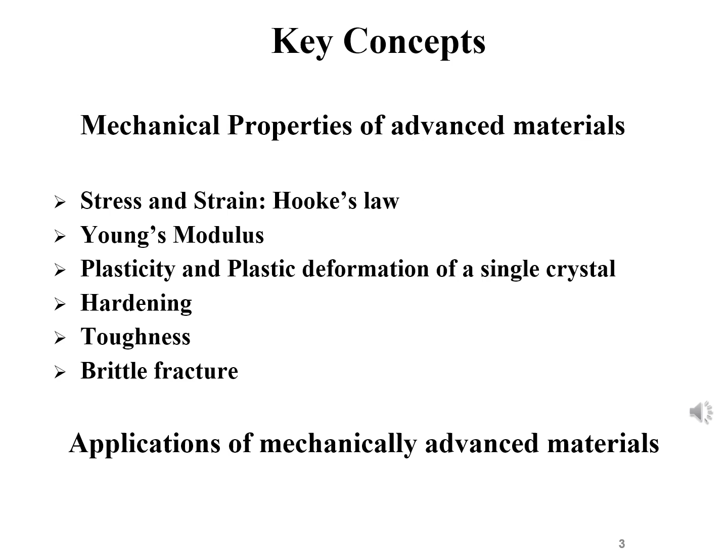So what is Hooke's law? It is related to stress and strain. It is a direct relation of stress and strain. When a material is submitted to an elongation force, its deformation is proportional to that applied stress. So the coefficient of proportionality between the stress, sigma, and the strain, epsilon, is Young's modulus, denoted as sigma is equal to E multiplied by epsilon.

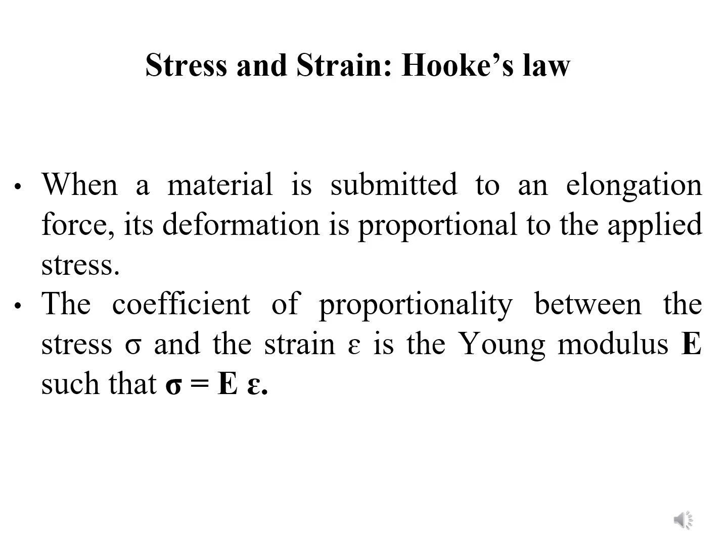Young's modulus is stress over strain, and it is denoted by E. We already discussed strain, that it is change in the length of the material divided by its original length, and stress is force divided by cross-sectional area. So we can represent stress as F over A and strain as delta L over L, and stress divided by strain is Young's modulus, and if stress and strain are directly proportional, that is known as Hooke's law.

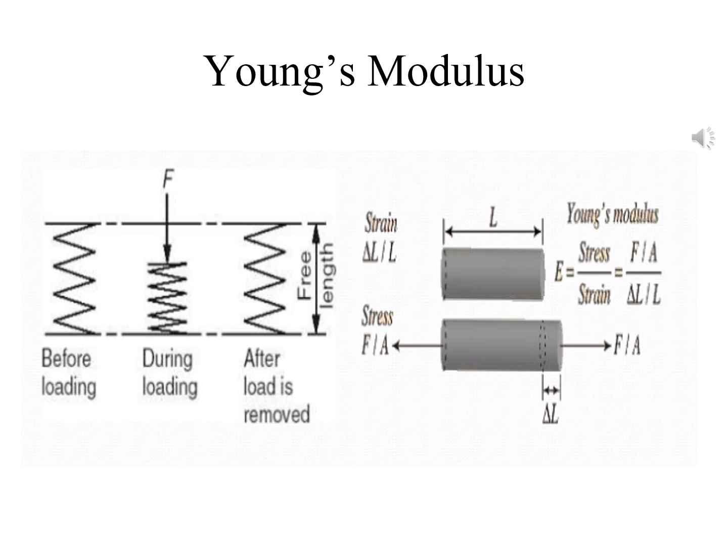So what is plasticity? Plasticity is non-reversible deformation in response to an applied stress or force. So how does plastic deformation of single crystals happen? When a material plastically deforms, its surface shows slip bands, and these slip bands are the emergence on the surface of dislocations. The orientation of these bands depends on the crystallographic structure of the material in which the plastic deformation occurs.

Here in the figure you can see the slip direction is on the right side, and you can see slip planes and steps that are known as slip steps, and the bands here in dark blue color are known as slip bands.

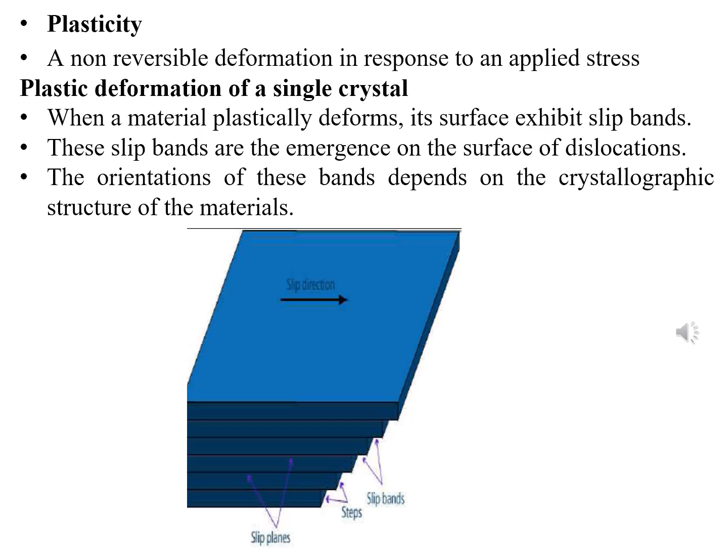So when dislocation occurs, plastic deformation may take place in single crystals, and this depends upon how the crystallites are arranged in that material and the orientation of the bands. When they slip, there will be plastic deformation in that material, and that plastic deformation is non-reversible. It cannot return to its original shape.

Dislocations are actually another type of defect present in crystals. Dislocations are the regions where atoms are out of position in crystal structures. When atoms are out of position in any crystal structure, we call them dislocations. A dislocation is actually a defect in a crystal.

Dislocations are generated and move when a stress is applied. When you apply any force or stress, these dislocations may occur and they can move. The motion of dislocations allows slip plastic deformation to occur. As in the previous example, due to dislocations, defects in crystals may emerge, and slip bands start in that material, due to which the material will be deformed.

If we compare early measurements performed on nanostructured materials with conventional grain size materials like bulk or micro materials, these experiments showed that nanostructured materials have lower Young's modulus values compared to conventional or bulk materials. So mostly nanomaterials have fewer defects, they have fewer dislocations.

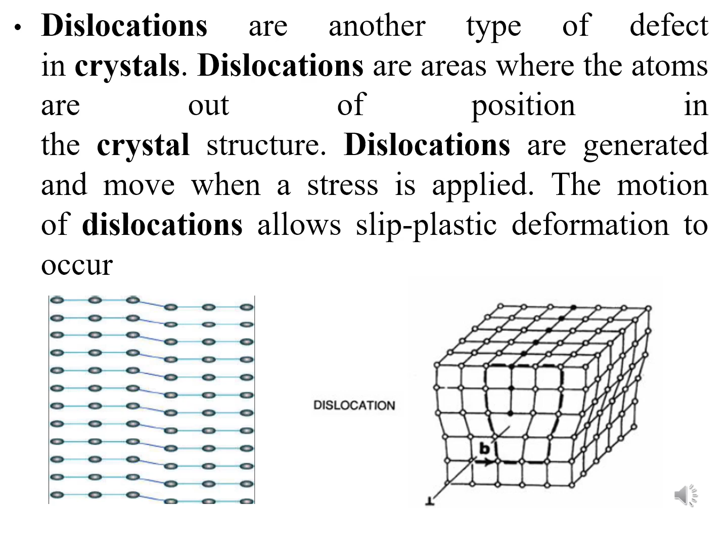Before, we generally discussed hardening and hardness of materials. Hardness of materials occurs when the motion of dislocations becomes difficult, even impossible, in that material. So a material in which motion of dislocations is difficult will be hard; it will show hardening properties, or hardness. Plastic deformation starts when dislocations become very active under

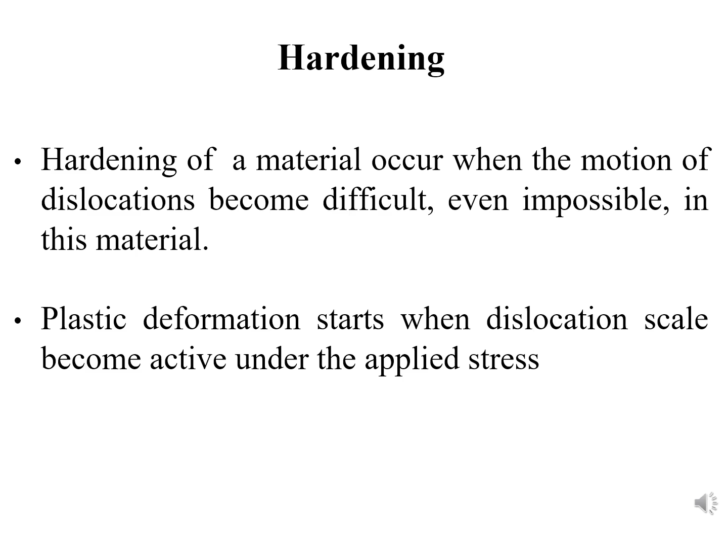In the case of the hardening process, among many of the novel mechanical properties of nanostructured materials, high hardness has been discovered in many nanostructured materials. In the appropriately synthesized systems, the hardness of nanomaterials or nanocomposites significantly exceeds that of the mixture in bulk. Super hardness also comes from pure nanoparticles.

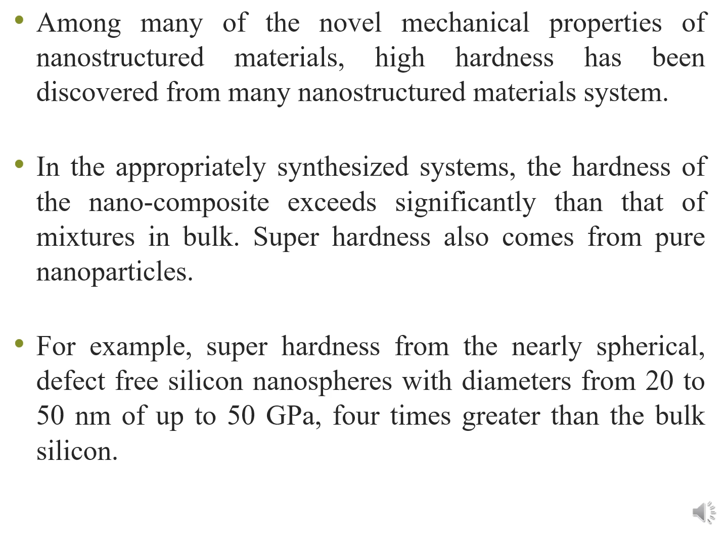Toughness: the ability of a material to absorb energy during deformation up to fracture is known as toughness. So a material is generally considered tough if it withstands a high level of stress and can dissipate strain energy without brittle fracture.

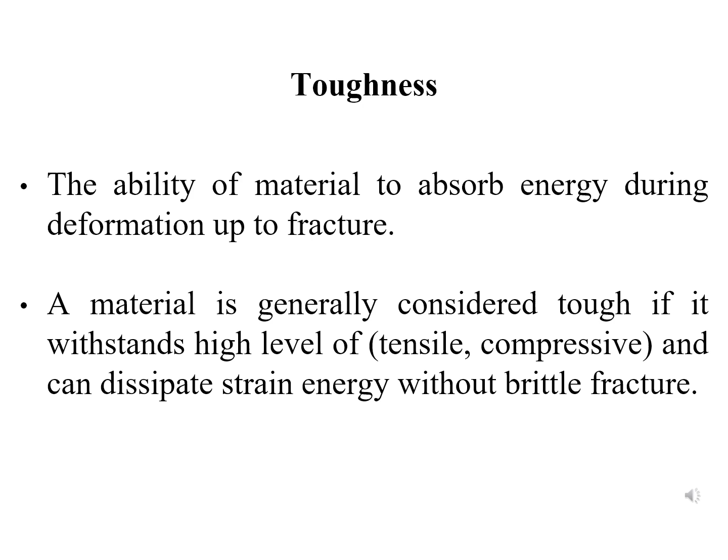Then we will talk about brittleness or brittle fracture. When we are checking mechanical properties of any material for designing, in addition to strength and hardness, toughness is also very important, and we should know this property as well.

So what is brittle fracture? Brittle fracture is the result of rapid crack growth. As the failure mechanism of high strength materials like nanomaterials is governed by brittle fracture, toughness is the key mechanical property used in material designing instead of strength and hardness alone.

So toughening mechanism: what can we do to make materials tough? For that purpose, multi-layering is an important mechanism. One way to improve nanomaterial toughness is to combine a hard nanocrystalline phase with a soft metal matrix, and we can improve its toughness. And toughening can be done using multi-layer design.

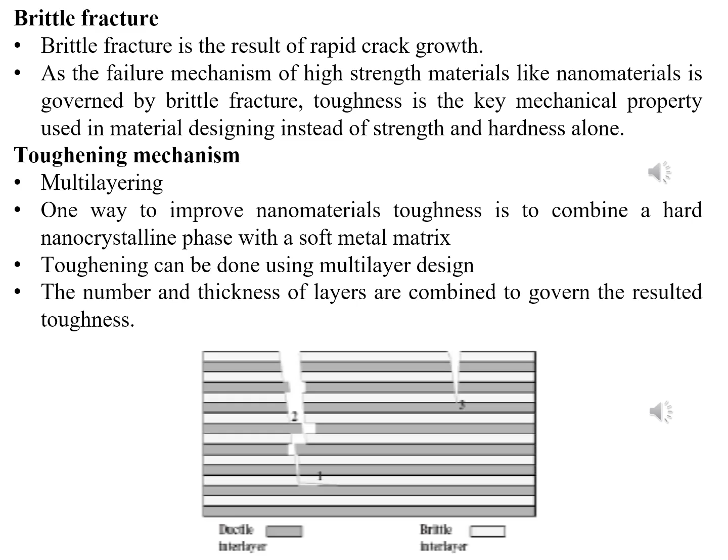As we discussed the mechanical properties of advanced materials and their characteristics related to their structures, if we consider these unique mechanical properties, nanoparticles can be used in a variety of advanced materials in different applications in different fields. So here we will discuss some important applications. First, tougher and harder cutting tools can be designed with nanomaterials.

Cutting tools that are made up of nanomaterials include tungsten carbide and titanium carbide. These are two examples of cutting tools made up of nanomaterials, and both are much harder and have much more wear resistance.

What is meant by wear resistance? Wear is a loss of material from a surface by means of some mechanical action. If you apply some force and there is a loss of material, wear resistance describes up to which force this material can maintain its shape or its surface. And these cutting tools are erosion resistant.

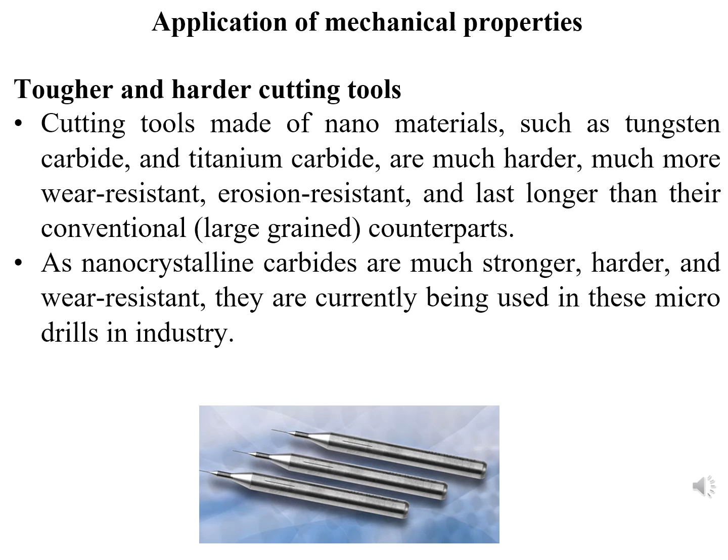Taking the example of nanocrystalline carbides, as they are much stronger, harder and wear resistant, they are being used in micro drills in industry. Here is the figure of these micro drills below, and these are made up of nanocrystalline carbides, which may be tungsten carbide or titanium carbide.

The next application of mechanical properties is automobiles with great fuel efficiency. As nanomaterials are stronger, harder, much more wear resistant and erosion resistant, they can be used in spark plugs. A spark plug is a device for firing the explosive mixture in an internal combustion engine. Here is a figure of spark plugs.

So automobiles mostly waste a large amount of energy by losing the thermal energy that is generated by the engine.

So engine cylinders are planned to be coated with nanocrystalline ceramics such as zirconia and alumina, which retain heat much more efficiently, and they result in complete and efficient combustion of fuels. So mostly automobiles waste energy in the form of thermal energy, in the form of heat.

So engine cylinders are coated with nanocrystalline ceramics; examples of these nanocrystalline ceramics are zirconia and alumina. These cylinders are coated with materials which retain that heat more efficiently, and they reduce the loss of that thermal energy, make the engines more efficient, and make the consumption of fuels less.

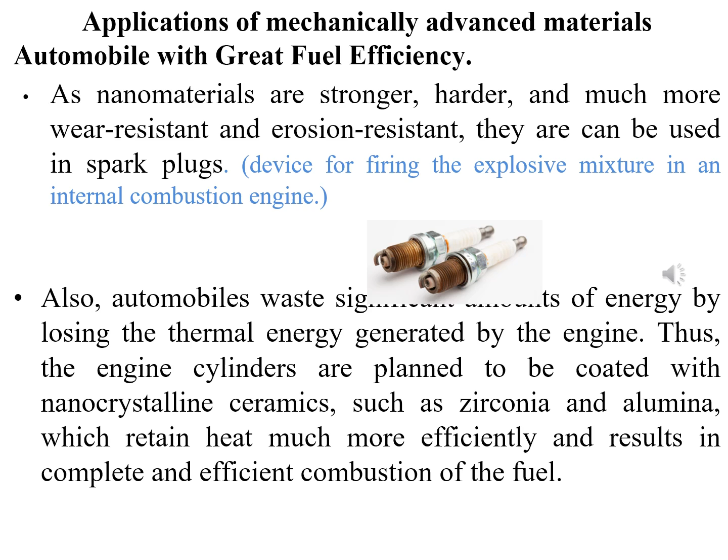So the next application is aerospace components with enhanced performance characteristics. Fatigue strength increases with a reduction in grain size of material. Now we can say that nanomaterials provide a significant reduction in grain size over conventional material, due to which the fatigue life is increased by an average of 200 to 300%.

So, what is actually fatigue? Fatigue life or fatigue. So, fatigue is a weakening of material that is caused by cyclic loading or stress that results in progressive and localized structural damage and the growth of cracks.

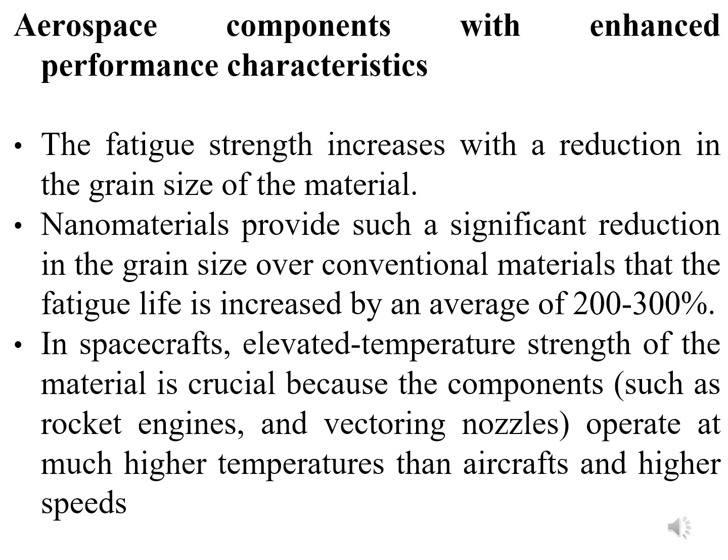So in spacecrafts, elevated temperature strength of material is important because components such as rocket engines and vectoring nozzles operate at much higher temperatures than aircrafts and at higher speeds. So these nanomaterials can provide fatigue strength and greater fatigue life as the size of material is decreased.

Next are ductile ceramics. Ceramics in bulk, if we consider them, are very hard, brittle, and difficult to design even at higher temperature. But with a reduction in grain size, their properties change drastically.

If we compare nano size ceramics with bulk materials, we say that ceramics are very hard and brittle, and it is difficult to design them at very high temperatures. But if size is reduced to the nanometer range, then their properties are completely changed.

So nanocrystalline ceramics can be pressed and sintered into various shapes at significantly lower temperature. When these are converted into nanocrystalline ceramics, they can be pressed and shaped into various forms, or they can be calcined or sintered at very low temperatures instead of high temperature.

For example, zirconia is a hard and brittle ceramic and has even been rendered superplastic. It can deform to great lengths, up to 3 times its original length. However, these ceramics must possess nanocrystalline grains to be superplastic.

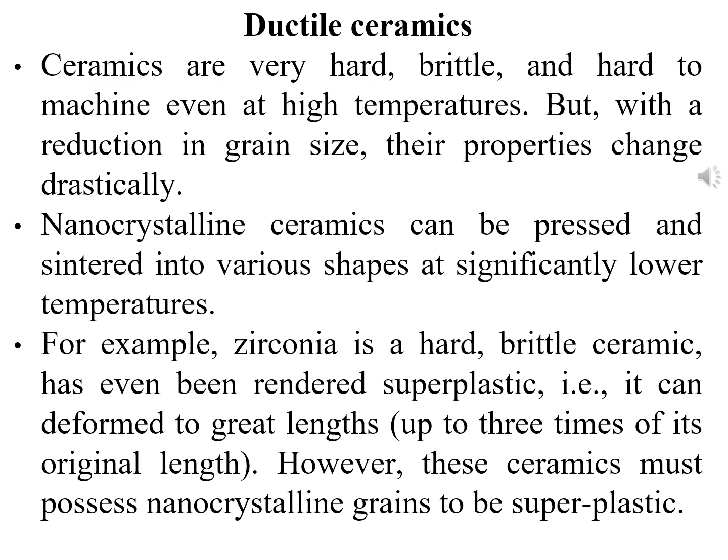So, ceramics that are based on silicon nitride and silicon carbide have been used in automotive applications as high-strength springs, ball bearings, and valve lifters, because they possess good formability and good machinability, combined with excellent physical, chemical, and mechanical properties. We can prepare different materials from them, and they are also used as components in high temperature furnaces.

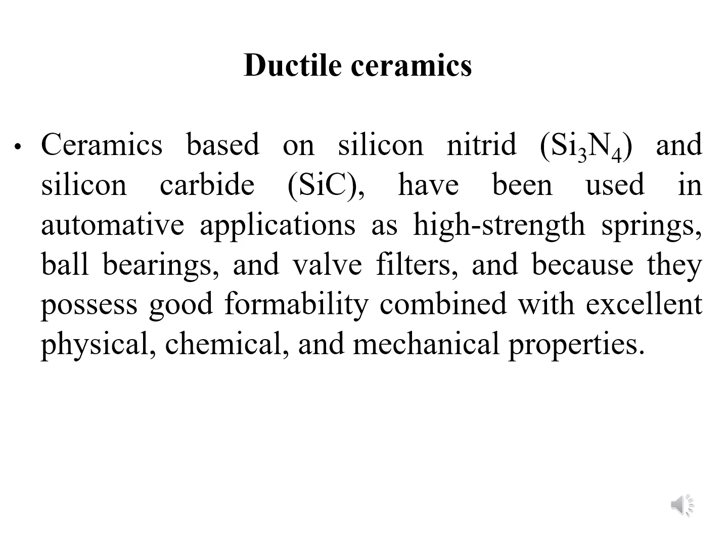So we can shape these silicon nitrides and silicon carbides for different automotive applications. We can form their components, we can convert them into different shapes, and they have good physical, chemical, and mechanical properties. So they could be used as components in high temperature furnaces, as they can withstand high temperature as well.

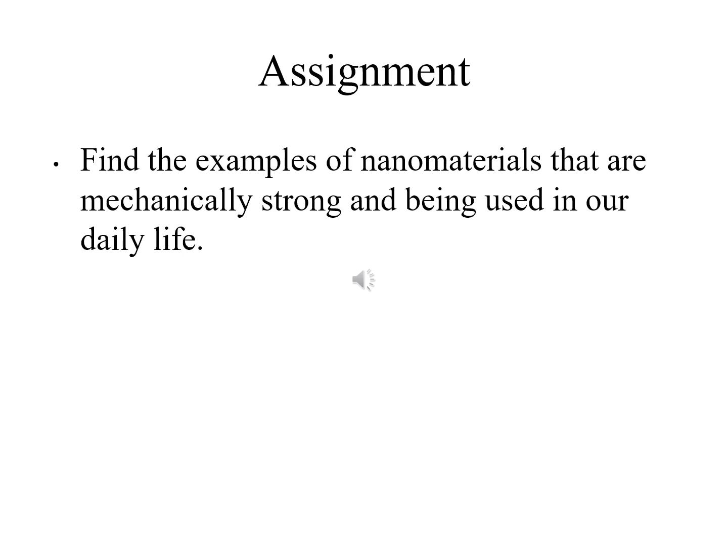For the assignment, you have to search after reading all these, or you can search out these references I have mentioned here, and thoroughly study these mechanical properties. You have to find nanomaterials or advanced materials that are mechanically strong, that have been synthesized and are being used in our daily life. You can take any material and any daily life example of that material which is mechanically strong and made up of nanomaterials.